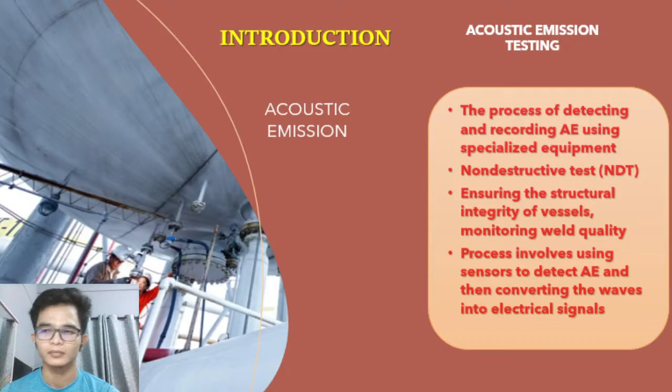Okay, there are several slightly different methods used for acoustic emission, such as global screening, monitoring during normal operating condition, proof test, failure test, and fatigue test.

Global screening is one method used to screen all components, and it involves increasing stress level slightly above normal using thermal or pressure gradient to reveal stress risers and cracks.

Monitoring during normal operating condition is another method involving monitoring known flaws or detecting unknown flaws that can easily be discovered by increasing the stress level.

Okay, proof test. The goal of a proof test is to show that a given structure can handle load up to a certain amount. In this test, we increase the load to the required amount. If successful, the test will not record any significant emission.

Next, failure test. A failure test aims to determine the load at which a structure begins to fail. It involves gradually increasing the load into the system, beginning to record emission that indicates failure is beginning to occur.

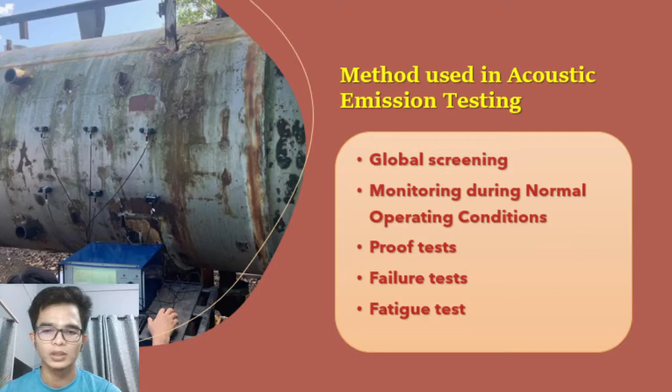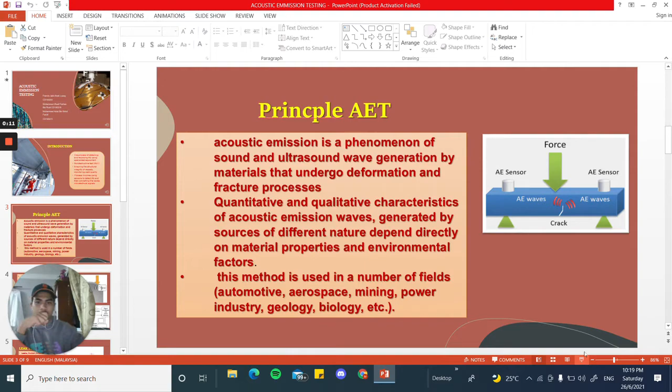Acoustic emission is the phenomena of the sound and ultrasound wave generation by the material that undergoes deformation and fracture process.

Okay, it is similar to other types of NDT methods, which are ultrasonic, eddy current, and magnetic particle, because they use the same method which is using wave and electric signals. The quantitative and qualitative characteristics of the

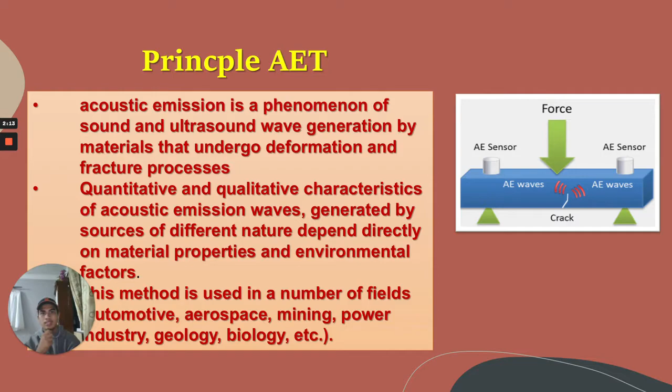Okay, acoustic emission testing works by mounting small sensors onto a component under test. As you can see in this figure, they show point number 1. The sensor converts the stress wave into an electric signal, which is relayed to an acquisition PC for processing.

Okay, as you can see, the computer data storage post-processor shows... it's more understandable when they say it's relayed to an acquisition PC for processing. Okay, the third point is that the wave is captured when the component is submitted to an external stimulus such as high pressure, load or temperature.

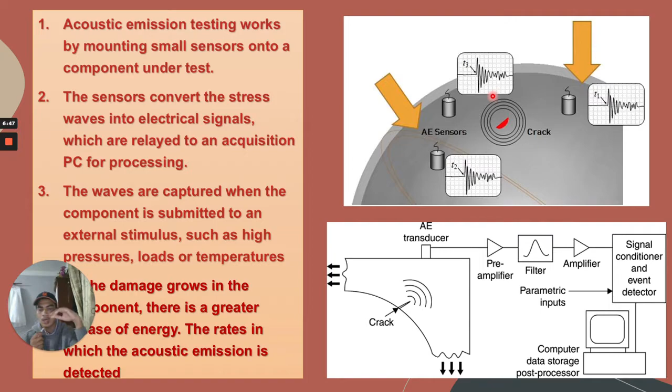The advantage of this method is it can be done in both situations, which is indoor or outdoor. For example, if we want to inspect a pipe at the site, we can bring the tools, because the tool is easy and light to bring wherever we want to inspect.

Okay, this one is for leak testing. Leak, friction, knocks, chemical reaction, and changes of size of the magnetic domain are other examples of sources generating acoustic emission waves. These are some examples of what AET can test.

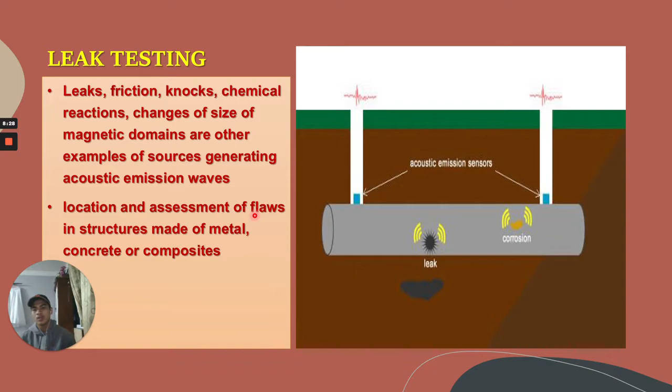AET can also be tested on metal, concrete, or composite, because concrete has the same meaning as a large structure, since normally concrete is applied to large structures. Okay, this is an example of how they carry out the AET process.

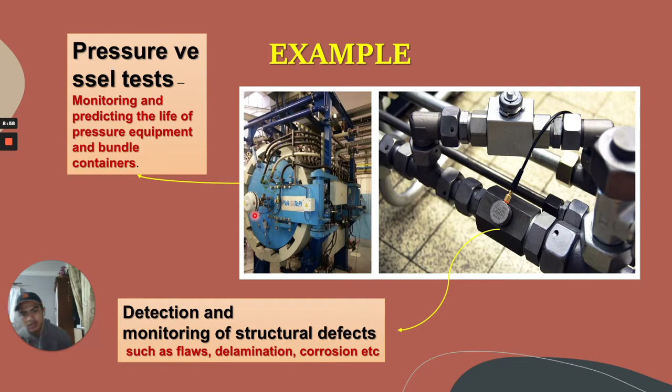For the first example is the pressure vessel test, monitoring and predicting the life of pressure equipment and bundle container. So then the second one is detection and monitoring of structure defects, such as a flaw, delamination and corrosion. So that's all from me.

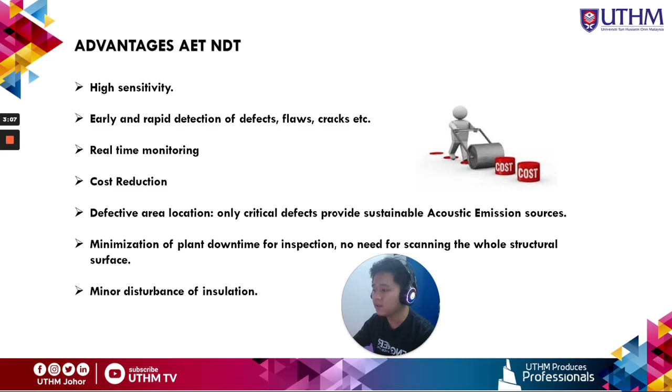Alright, defects locations. Keep in mind that in AET testing, when more than one sensor is used, the acoustic emission source can be located. The defective area location is based on the wave propagation principle within the materials and affects measuring the signal arrival time to each sensor. By comparing the signal arrival time at different sensors, the flaw location can be defined through triangulation.

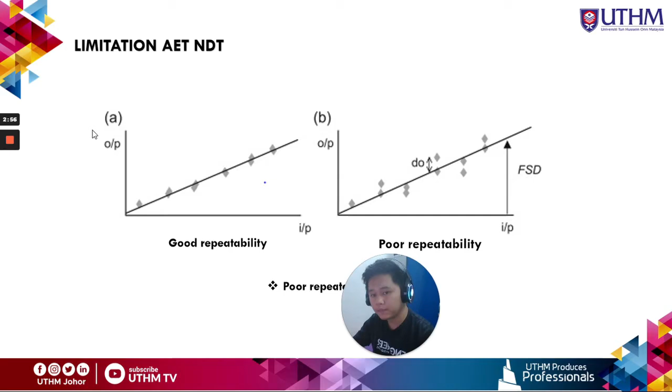So next, limitations of AET. The first limitation is, as we note in general, poor repeatability. As you can see in this diagram, A and B: A is for good repeatability and B is for poor repeatability. So the limitation for AET is mostly poor repeatability. As you can see the dots here in the final analysis graph, there is a gap in the dots.

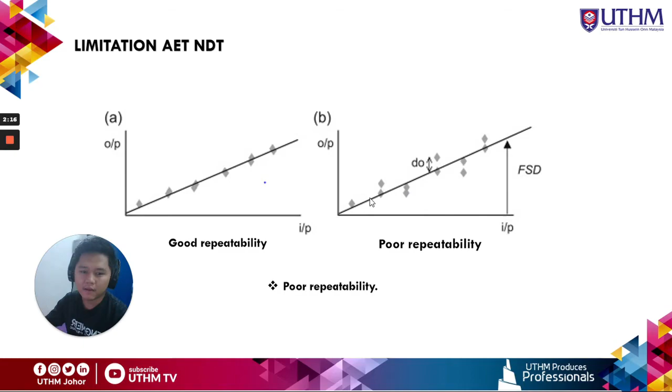Despite all the advantages of AE testing, we have to clearly point out that this AET cannot be applied always and everywhere. Defects which are neither growing nor moving do not produce AE and thus cannot be detected.

So what is data processing? The influence of ambient noise and intrusion of signal may result in poor output. This means the importance of data processing. So what is the need for data processing? Importance of data processing includes increased productivity and profits, better decisions, more accurate and reliable results. That's all for me. Thank you.